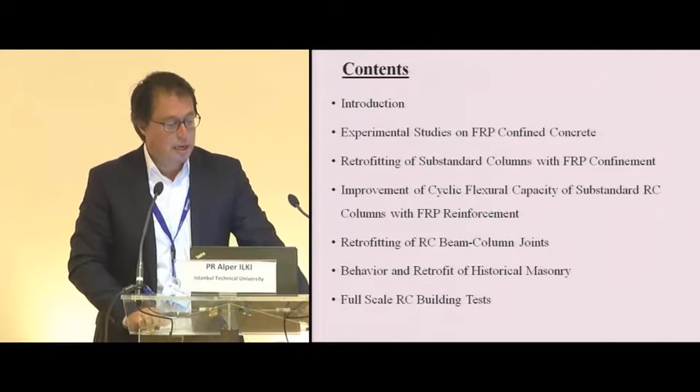In the content of my presentation, I will make a brief introduction, and then, similar to Maurizio and Thanasis, I will share some experiences we had on FRP confined concrete, and then retrofitting of substandard columns with FRP confinement.

That's very important for Turkey. The word substandard is very important for Turkey because we have a lot of existing structures in many big cities, and unfortunately a great majority of these structures are substandard in all aspects. Concrete quality is poor—meaning around 10 megapascal compressive strength on average, with some as low as 7 or 6 megapascals in many cities. Plain bars, poor detailing, and so on—you can find any kind of structural problem in existing structures.

The problem is that seismicity is much more severe than in France and the rest of Europe. So we expect severe earthquakes which could cause significant casualties and significant damage. That's very important for Turkey.

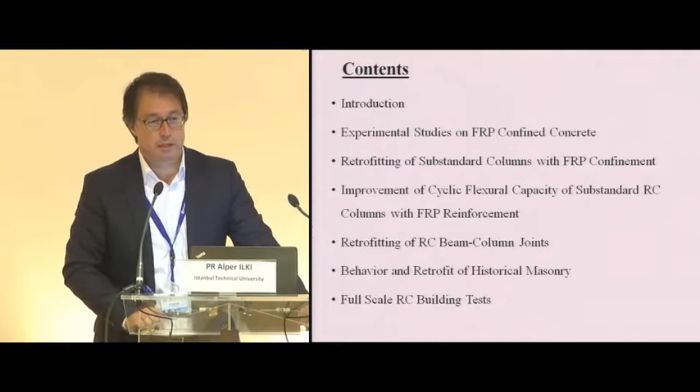In Turkey, there are seismic codes from very old times. Some recent codes were published in 1998, just one year before the great earthquakes we experienced in 1999. Then in 2007 we revised the code, and a new code will be published within about 3 months—roughly 500 pages on seismic design, including seismic safety assessment of existing buildings as well as seismic retrofitting. These two parts were added to the seismic code in 2007.

Constructions are much better now, but most structures were built in the 60s, 70s, and 80s. People are living in those buildings, so they need retrofitting. Unfortunately, the government doesn't look at the retrofitting issue very favorably—they prefer demolishing and reconstruction, which is not always possible. So there are still many structures that should be retrofitted. FRP is generally a good option, and owners of buildings are happier because of the relatively less disturbance to occupants.

Most of our studies have been focusing on substandard structures, which represent existing structures in Turkey and probably in many other places—perhaps some parts of Italy, maybe Greece, the Balkans. I believe there are similar structures there.

Then I'm going to talk about improvement of cyclic flexural capacity of substandard RC columns with FRP reinforcement. I was happy to see there are already works going on these issues in the private sector, by Freyssinet and other companies. Then I'll talk about retrofitting of reinforced concrete beam-column joints, and the behavior of retrofitted historical masonry structures, which we have a lot of in Turkey.

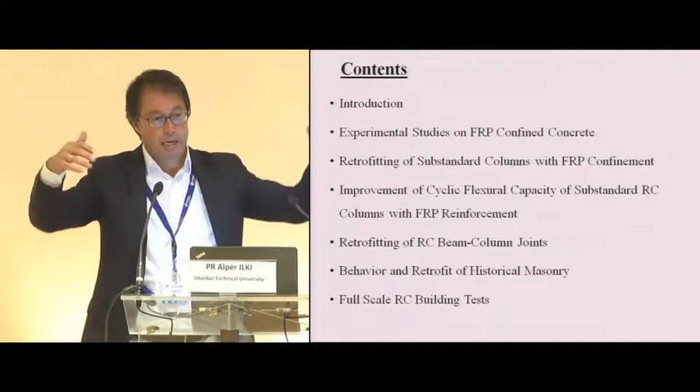I'm going to summarize some work we will carry out on full-scale real buildings of 3 stories within about 1 month. I was hoping to show you results of this test on two specially built 3-story structures on a field, which will be tested at the same time—one retrofitted with FRPs, the other not, but with all the same characteristics. Unfortunately, in Turkey we experienced very strange things, like a coup, last month, so we couldn't complete the test as planned. Therefore, I'm just going to show some preparations and theoretical aspects of this study.

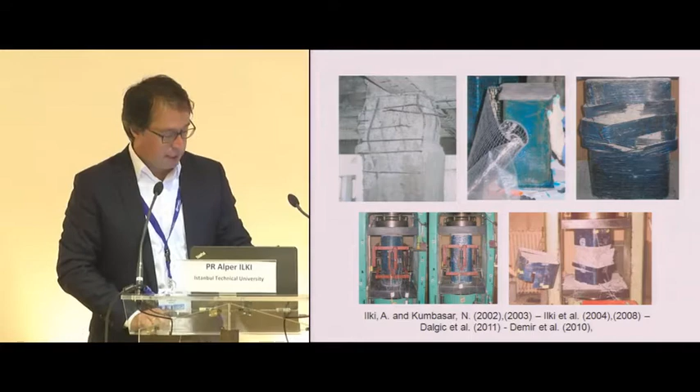So a little bit on confinement. As you can see, that's a great problem—even with good spacing, the hooks are poor. In many cases, spacing is much less or much higher than this in Turkey, like 20 to 25 centimeters.

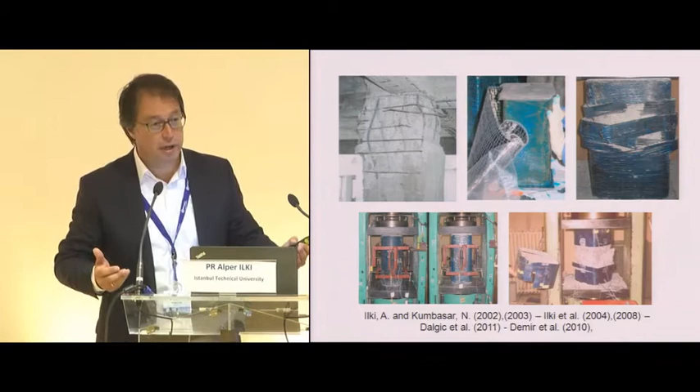Yesterday, Thanasis mentioned that if you have stirrups with 25 centimeter spacing, you shouldn't consider that as confinement. That's correct. In many cases, the details are also not good enough to consider them real confining reinforcement, because the angle is not 135 degrees but just 90 degrees, and the hooks are very small so you can never get proper anchorage. So almost they behave like unconfined concrete, meaning no ductility, which is vitally important during an earthquake.

Therefore, we began the work using confinement, but unlike the usual works carried out in literature, they were relatively larger scale specimens, and they generally included reinforcing bars inside to represent the actual situations in a more realistic manner. And we tested many different types of sections, many different types of concrete strength, many different types of fibers, hybrid fibers, pre-damaged cases, cyclic loading, etc.

Based on this work, but now we see that we can even apply these when the aspect ratio is like 3. Because even though it doesn't increase strength significantly, it has substantial enhancement in terms of ductility, which is much more important in case of seismic issues. That's the main issue in the earthquake. You need ductility, because particularly if you have a low quality structure, it is impossible to resist seismic forces with your strength, but what you can do is only to increase the ductility. So this was very good news.

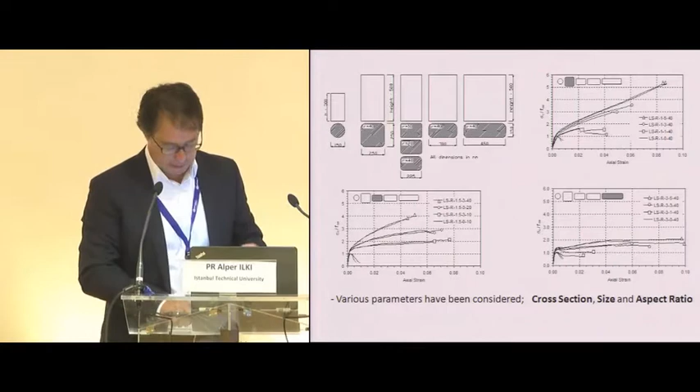And we examined different effects: loading rate, different types of concrete quality. Of course, there's good news about a bad situation. When you have low quality concrete, firstly, your concrete is more ductile. A 7 megapascal concrete is more ductile than a 30 megapascal concrete. And also, you can improve your behavior much more easily by using FRPs with respect to high quality concrete.

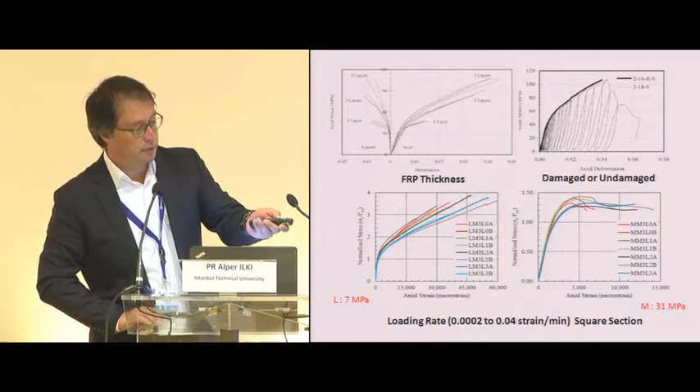So that's kind of an advantage. Here you see, for example, 7 megapascal concrete wrapped with FRPs, and here you see 30 megapascal concrete wrapped with FRPs. You see that improvements are significantly different. So it's always more difficult to enhance the behavior of a good quality concrete rather than a poor quality concrete.

In these graphs also, the loading rate was studied. And obviously, interestingly, when the loading rate is low, we had higher deformability, very probably because of the creep of the concrete during the loading. But again, this was different when the concrete quality is different. You cannot always say that loading rate is very effective on the behavior. It depends on the section shape, it depends on the concrete quality as well.

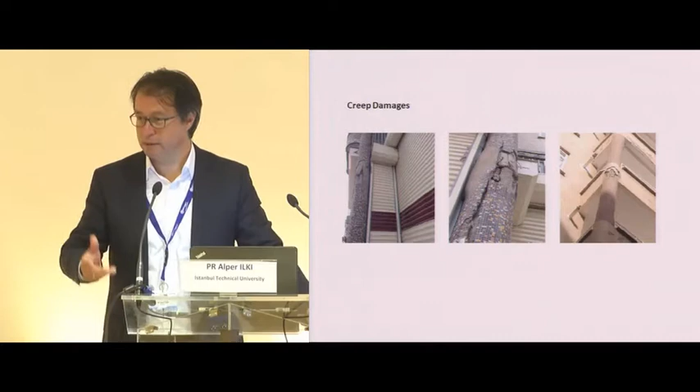About creep damages, this is a photograph from a kind of high-rise building, 12-story or something like that, in the east part of Turkey. These damages didn't occur during an earthquake. This occurred during vertical loads. Sometimes some structures collapse under vertical loads in Turkey, rarely, but it happens, without any extra load, without any ground movement or settlement, very probably because of creep effects.

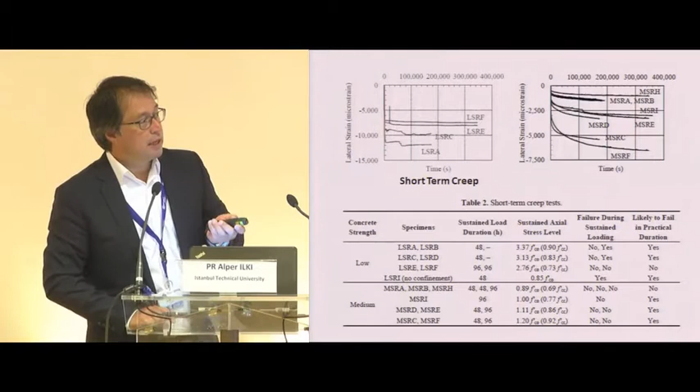Therefore, we carried out many works on long-term loading to see the creep effects and how we could improve the behavior under creep, under sustained loadings. I'm not going to go into details of these numbers, but basically I could say that you could significantly increase the creep performance, or enhance the performance under sustained loading significantly.

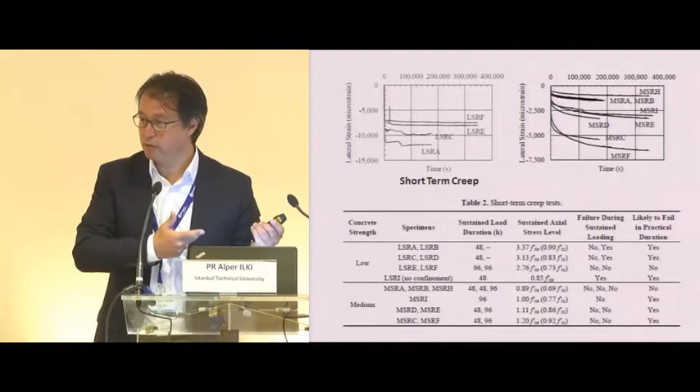Why is this important? Because, as I mentioned, in Turkey concrete quality is around 10 megapascal, whereas during design it was considered as, let's say, 20 megapascal. So normally in design, axial stress on the column is, say, 0.3 or 30% of the axial capacity. But in real life, it is 60% or 70% of the capacity, sometimes more. Therefore, creep is a significant, important, and common issue. So you have somehow to improve this situation, to avoid this kind of failure, even under vertical loads.

So this works as well in these cases too. I'm not going to enter into details, but I think you should have noticed yesterday that when you confine the section with FRPs, in case of rectangular sections, you have to round the corners to avoid stress concentration.

You see, obviously, the behavior is different. So there are a lot of models, as my colleagues mentioned yesterday. But if you don't consider, for example, this simple effect, you could end up with significantly different results. It's a small detail, but very effective on the behavior.

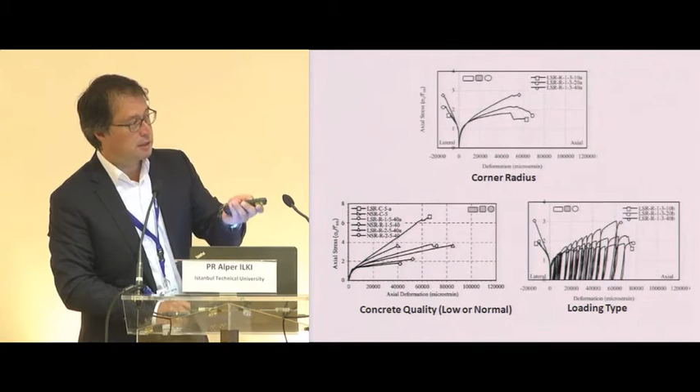I have mentioned that the concrete quality is important. When you have lower quality, the enhancement is much higher. And if you compare these two, cyclic loading and monotonic loading, they are identical specimens. The behavior is almost similar with some marginal differences, which is again good news for the type of earthquake loading.

And also we had many tests for determining the combined action of internal steel reinforcement and external FRP wrapping. It wasn't always like this type of scarce transverse reinforcement, but we had also frequent reinforcement situations as well. So I can, as a summary, say that you could think about the contributions of internal confinement and external confinement and sum them up, and you go to a reasonable situation.

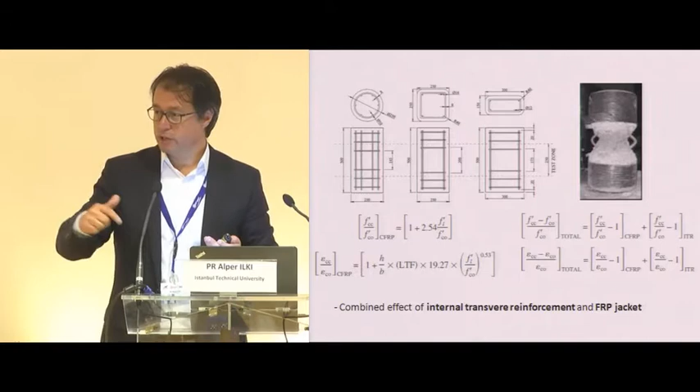So you can simply determine the confined concrete characteristics within the core using any model, say Mander model or any confined concrete model. And also you can consider the whole section using the external confinement, and you come up with a rational result for that.

And with that, I complete the concentric compression test, and I want to go ahead to retrofitting of substandard columns, of large-scale columns with FRP confinement.

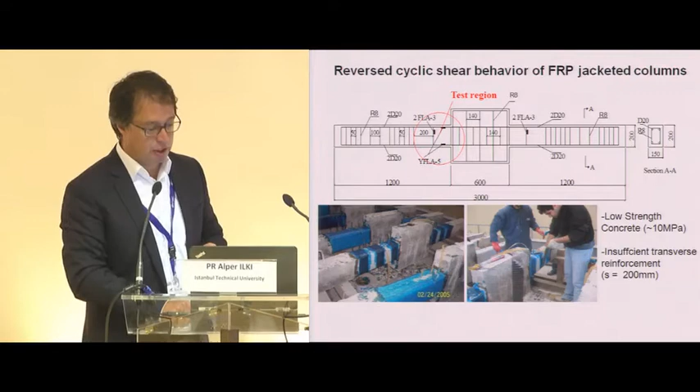There are some tests for shear. Yesterday, my colleagues mentioned that obviously we have a significant increase in shear. But what I have mentioned to my colleague from France was that, for example, these columns are retrofitted in shear using different FRPs.

So you should have a margin. I mean, if you have already used a lot of transverse reinforcement, it may be irrational to use some more FRPs because diagonal compression failure may be an issue.

Anyway, this depends on your situation. If you are lacking transverse reinforcement, yes, you can increase your shear capacity.

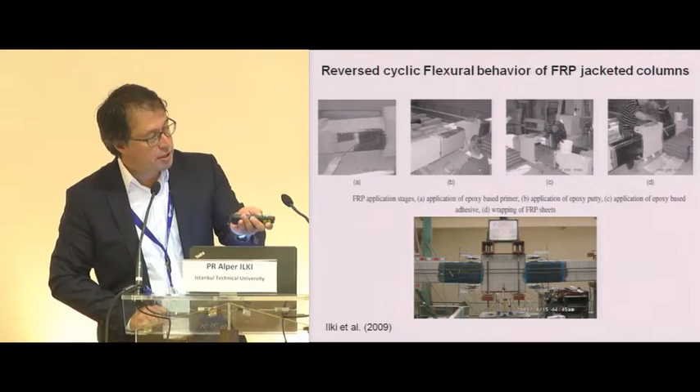These are another group of tests that we made retrofitting of potential plastic hinge regions of columns using FRPs and other different types of jackets. I'm just going to show you an FRP case. Again, my colleagues mentioned that you could improve the lap splices.

So these two groups represent two different types of specimens. In this group, there is no problem about lap splice, but the problem is about lack of sufficient transverse reinforcement. So the reference specimens behave in quite a brittle manner. The deformation capacity is very low.

And when you wrap them up with FRPs of different thicknesses or different application details, you can reach the theoretical flexural strength, so that's what we want.

But in case of deficient lap splices, in this case, where we used plain bars, the improvement is not as significant. I should say that in this case, when the plain bars are used, there is no hook at the end of the lap splices.

Of course, normally you should have this lap splice hook, but there are many cases where the hook is not applied at the lap splice. So if you think that the Eurocode equations may be valid also for plain bars, that's totally incorrect, because the external transverse deformation, which would lead to slip of plain bars, is much less with respect to deformed bars.

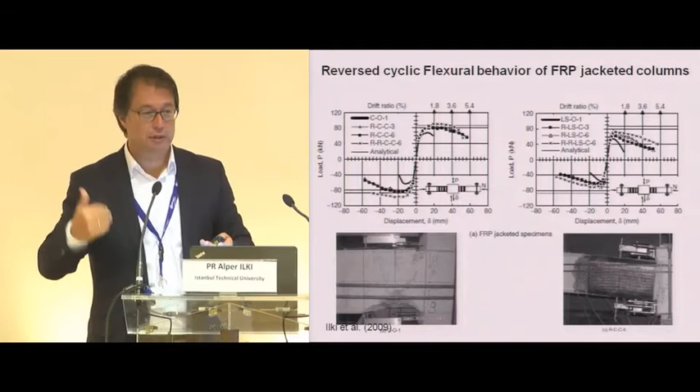So this kind of lap splice deficiency in case of plain bars without hooks would not work well. Only small enhancement in the behavior could be obtained.

This is another group of specimens, quite large scale. The section is 30 centimeters by 60 centimeters. The PhD work is ongoing. There are different sections with cross-section aspect ratios of 1, 2, 3, and 4.

So we are testing rather full-scale specimens like that to see whether we can extend the existing equations, existing approaches, for larger scale specimens as well as larger aspect ratios.

The tests were carried out in two directions: on the strong axis of the column, so the lateral load is in the direction of 60 centimeter depth, and also in the weak direction of the column, which is more critical because we don't have the cross ties.

When you have the FRP, it's good in the strong direction because the compression part is quite close to corners where you have good confinement. But during loading in the weak direction, you may need cross ties.

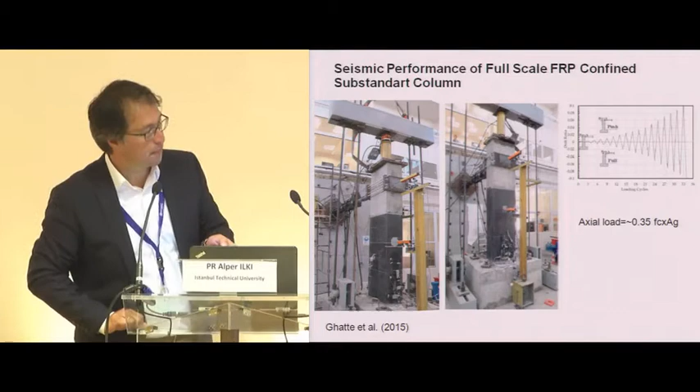If you look at the failure of this specimen, which is 30 centimeter by 60 centimeter and loaded in the strong direction, the axial load is quite high. There were different levels of axial load, but this test was under 35% of the capacity of the column. So keeping that load, we applied reverse cyclic loads.

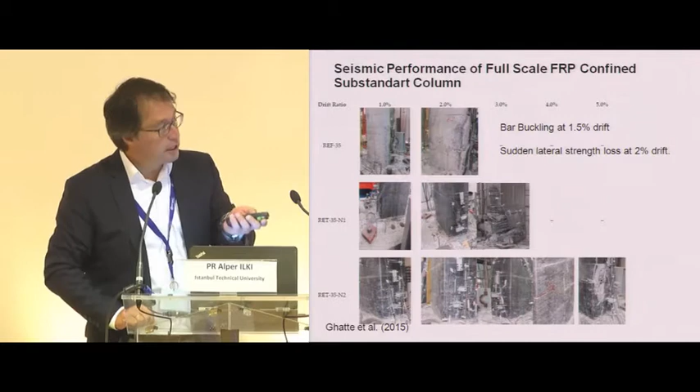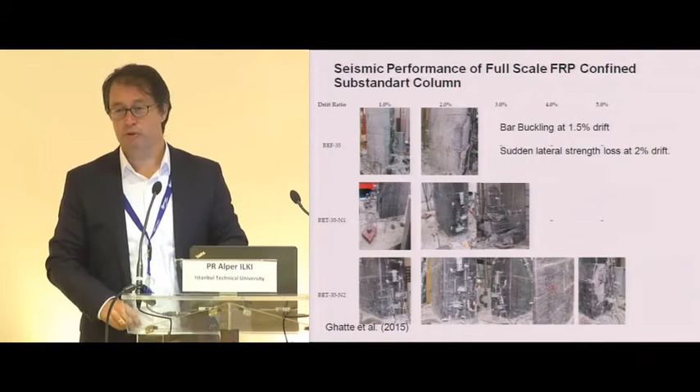The reference specimens without retrofit were damaged significantly at 1.5%, and suddenly lost lateral strength at 2%. When we retrofit the column with 1 layer and 2 layers of FRP, the specimens could sustain the lateral load up to 5% drift, which is quite good enough for even high seismic zones. So significant improvement was obtained.

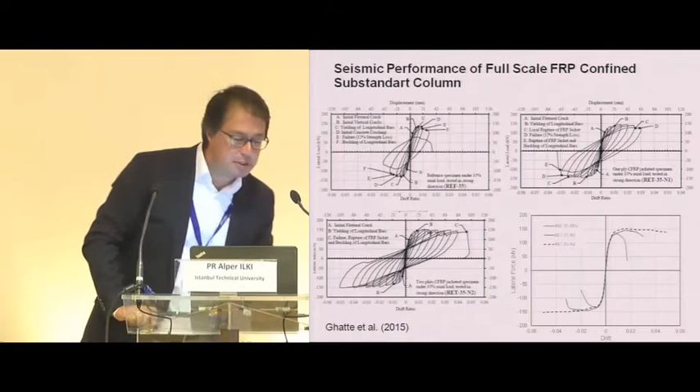This shows the load displacement graphs. You can see both the drift ratios and displacement values here, and load values here. So that's the reference specimen - a behavior that you wouldn't like to have. After retrofitting, you have this type of behavior, and this shows the comparison of the envelope curves of these load displacement diagrams. So absolutely we could go where we wanted to go.

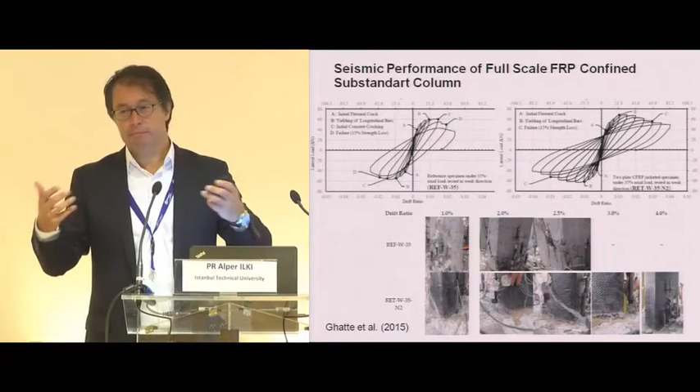This shows two specimens tested in the weak direction, where FRP might not be equally effective because you don't have the cross ties. But still, as you notice here, the ductility is improved with respect to the reference specimen - not much, but again better than the reference specimen.

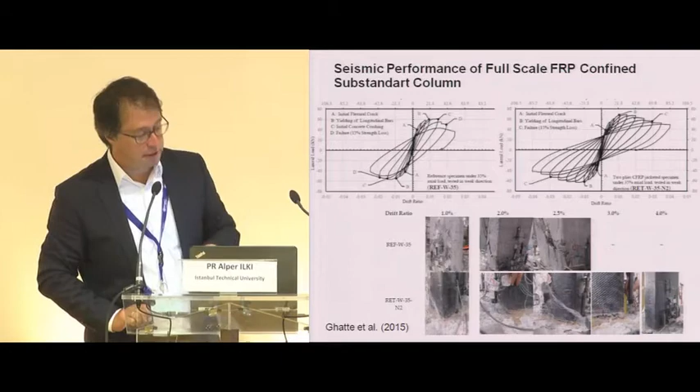So another issue which is relatively new: improvement of cyclic flexural capacity of substandard RC columns with longitudinal FRP reinforcement. Flexural retrofit has been done for beams, span sections of the beams, for a long time, but not for columns where we have moment reversals, and also the anchorage is an important issue to the foundation.

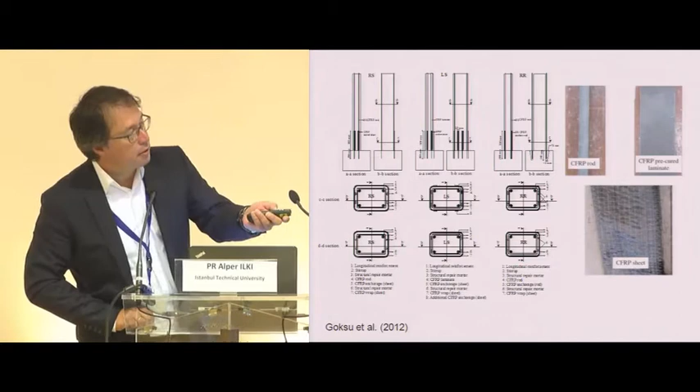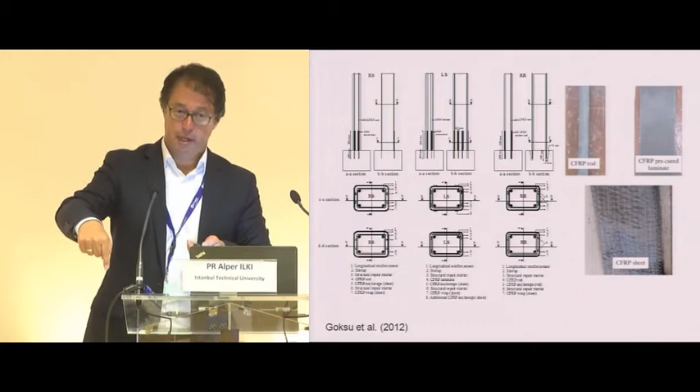At the end, we determined that when we have to open a large hole - not like a driller, but a large hole - by breaking the bottom part of the column, and using a good grout and putting the rod inside, this works. Otherwise we always had difficulty because it's very difficult to do this properly using normal workmanship on site. If you try to put epoxy inside a drilled hole, at least we couldn't manage this, although we paid a lot of attention. So practically I think it's not possible to have a good result by drilling a hole and trying to anchor it inside.

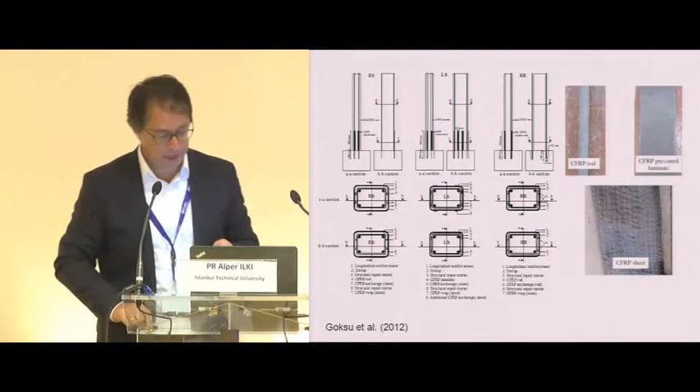So with that, there are some applications here. This was an interesting application actually, because that's not like external bonding, and also not like near surface mounting. In Turkey, generally for these old types of structures, we also have corrosion problems, and since concrete quality is poor, what we have to do is generally take out the concrete cover to clean the rust. You have to do this also because there are a lot of cracks already on the column. When you remove this, it's also good because you can have a better cover concrete with a better repair mortar.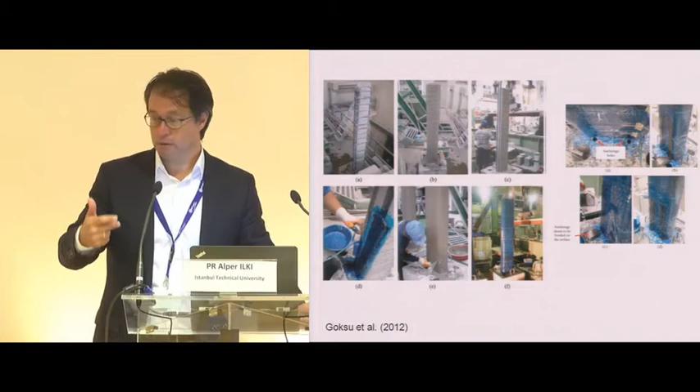Then put the reinforcement, FRP reinforcement, and make the cover again using a good, better quality repair mortar, and then wrap it in the transverse direction to avoid shear failure, because when you increase your flexural strength, you may be in trouble in terms of shear due to capacity design. So you also have to use transverse reinforcement using FRP sheets.

But when you properly anchor the rod to the hole that you opened in the foundation, you could achieve both very high strength, which is maybe too high in this case, but more importantly, the drift capacity to sustain this load is more important. So you have a much more proper behavior.

If you look at the joints, which are often problems in the corner members, I think yesterday one of my colleagues mentioned that if you have good columns, the joint may not be that important because you have the slab and transverse beams framing into these joints. But in the corner joints, the situation might be a little different and might cause significant problems, as you see here. So we tested large-scale, full-scale columns or sub-assemblages, and you will see three-dimensional frames to examine this behavior.

I want to remind you of three types of failures I'm going to talk about: J-type failure, which is the shear failure of the joint; SJ-type failure, which is a slip of longitudinal bars of the beam within the joint, followed by failure of the joint; and B-type failure, which is what we want, where the joint doesn't get any damage but the beam fails due to flexural mechanisms.

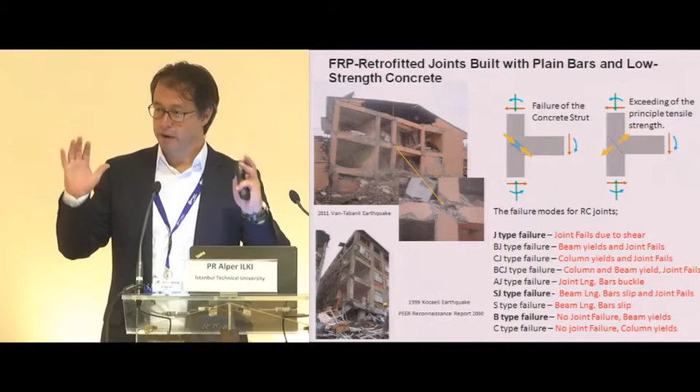So I will show you three specimens of different arrangements showing how we obtain these three kinds of failures. These are the joint specimens tested, about 20 specimens were tested like that. They are full scale. The columns are 25 by 50, and the beam is 25 by 50, and also we have a same dimension transverse beam and a slab of 8 centimeters.

Often joint tests are carried out without this transverse beam and the slab. I think there are two problems with this type of test. One is you underestimate the performance of the existing joint, because you omit the transverse beam and the slab, which have some effect on the shear performance of the joint. Secondly, you overestimate the effect of retrofit, because you can easily wrap that kind of joint, whereas you will not be able to do that in practice because of the presence of the slab and transverse beam.

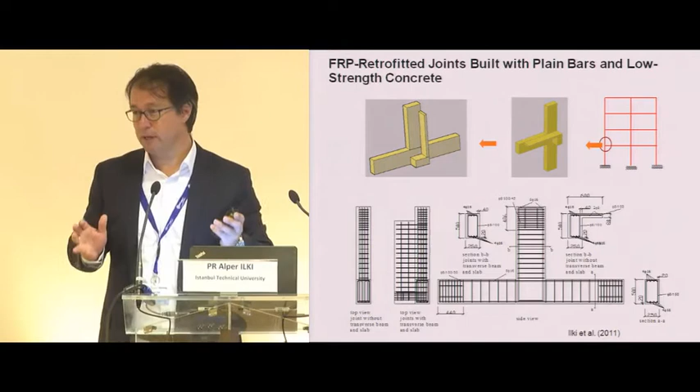You see this specimen, as you clearly understood, this is the column, horizontal, this is the beam. And as you see, there is no reinforcement within the joint core. This was the actual practice in Turkey until the 1999 earthquakes—no joint reinforcement, you cannot find any.

So this is the testing setup. We had axial load of different levels, from 10% to 50%, even more than 50%. These are some measurement details, and this is the loading pattern, displacement controlled.

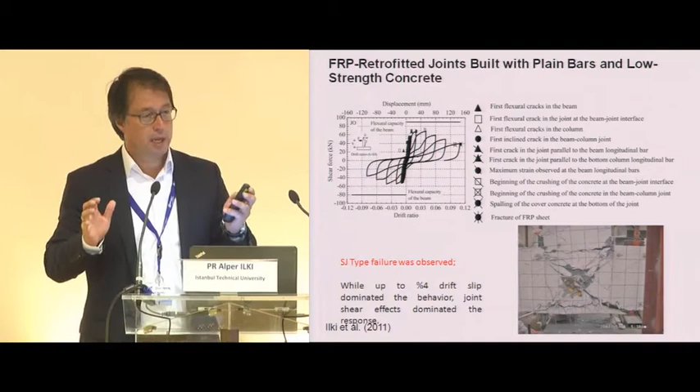And this is the behavior of the reference specimen. Hard to decide if it's good or bad. This is the theoretical flexural capacity. In this specimen, beams are weaker than columns, but joints are weaker than the beams, so the critical part is the joint.

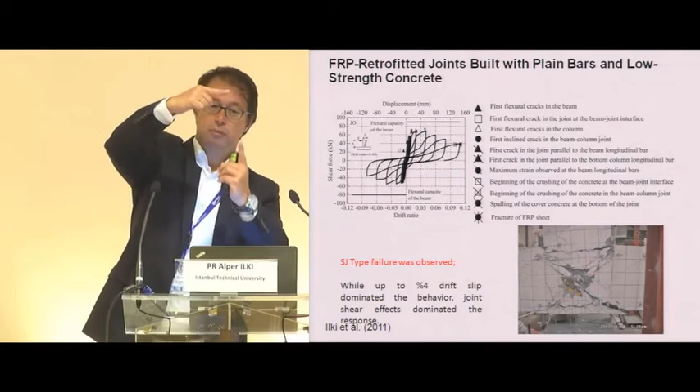I don't know, how do you evaluate this one? This is not too bad, I guess, because even though the capacity is less than anticipated during design, the joint can sustain its capacity until 4% drift, through a mechanism we never considered during design. What happens is that under reverse cycle loading, the beam longitudinal bars hooked into the joint cause crushing of concrete in front of the hook. Therefore, the bars slip out before reaching their yielding stress, so the capacity is less.

However, due to this unforeseen slip type of behavior, we have a kind of pseudo-ductile behavior, so you don't lose the strength, unlike shear failure. Interestingly, if everything was as we wanted, so there was no slip, there would be shear failure, which is much more brittle than this. So anyway, this is still not the thing we want.

But you should consider this during actual life, when you make a design decision like, okay, I'm going to wrap it. No, it will not work, because there will be shear failure, and your FRPs probably will not work in such a case, for example.

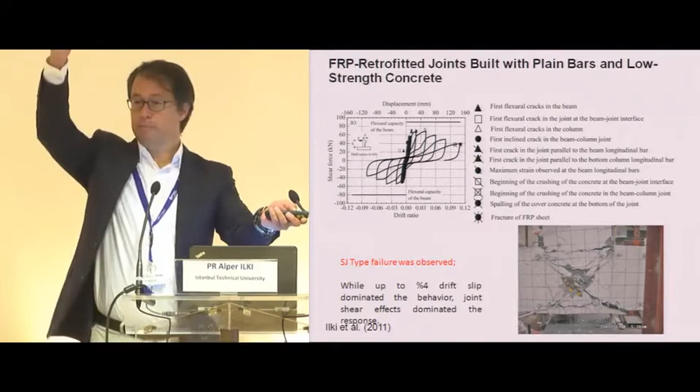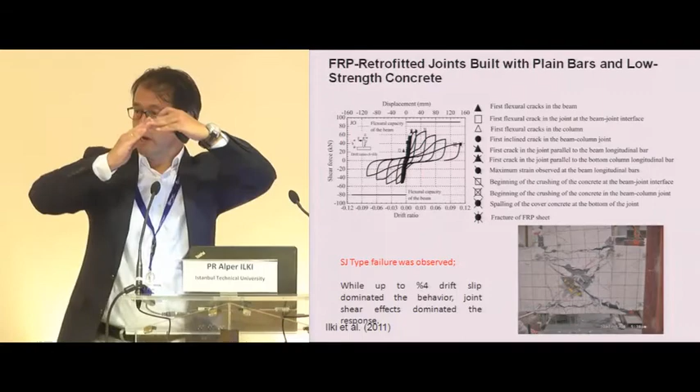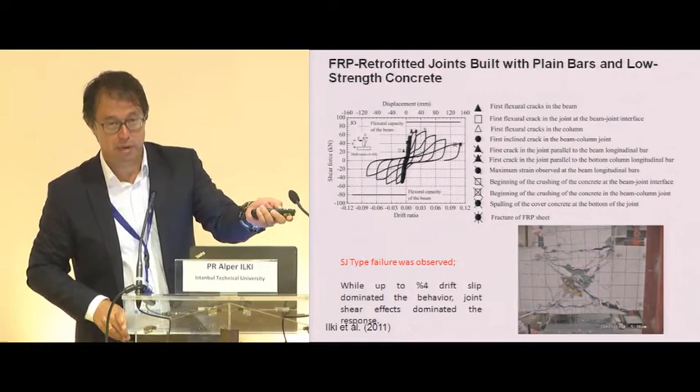So firstly, this problem should be solved. By the way, I should highlight this point: the main crack is here on the beam, just at the interface of the beam and the joint. There were some shear cracks because the hooks of the longitudinal bars were going out, crushing the back part of the joint. But the main damage was the crack at the interface, basically due to slip of longitudinal bars. This explains the mechanism. This is the damage, and this is what happens to the longitudinal bars. So main crack here, and also some damage because of hook deformation, and some shear deformations and damages.

So if you directly apply FRP, you don't get any change. I'm not going to show the result here, but we tested it as well. This specimen, you wrap it up with FRPs, nothing changes because slip occurs again. So you gain nothing. You do a lot of things, gain nothing. So first, you should somehow avoid this kind of slip of longitudinal bars, which is not easy.

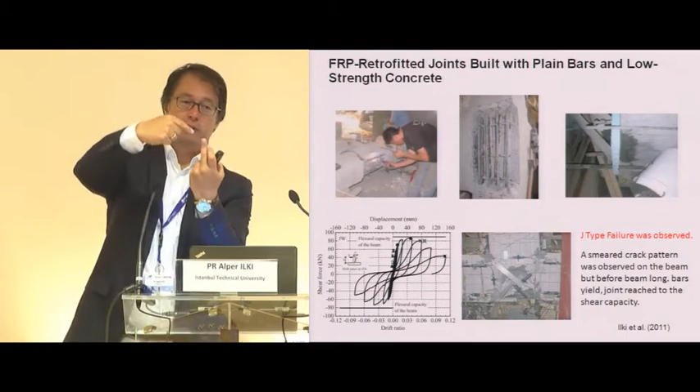What we did was, we removed the back part of the joint. You can do that because there's a corner joint, as I mentioned, so you can go up there and clean the cover concrete. On top of that, just in front of the hooks, behind the hooks, we changed the concrete with a better quality concrete, kind of repair mortar. So now, in front of the hooks, you have a better concrete which could resist compression stresses. And also, we just welded the hook of the top bar to the hook of the bottom bar. So we hoped that we avoided the slip, and we really did.

As you see, we could reach much higher strength, but then shear failure occurred at this strength level, so we had a brittle failure.

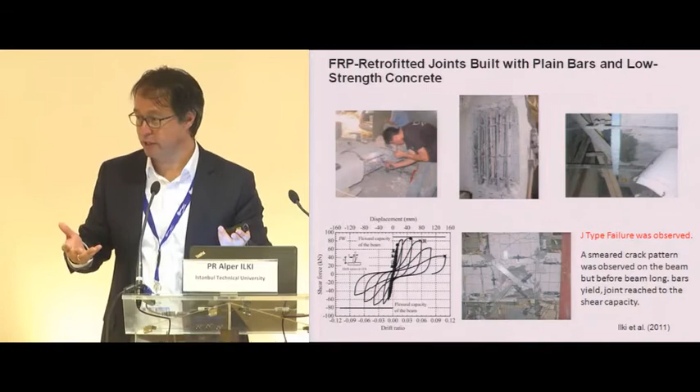Now this is a better specimen to see the contribution of FRPs, because we want to avoid shear failure. We retrofitted such joints, which fail with shear failure, using different configurations of FRPs. Note that these are totally applicable details because they represent the real assemblage totally. All you have to do is remove some part of the wall here and here. There's no anchor, there's nothing, just you wrap the joint and the column, that's it. No drilling and no bonding into the drill holes.

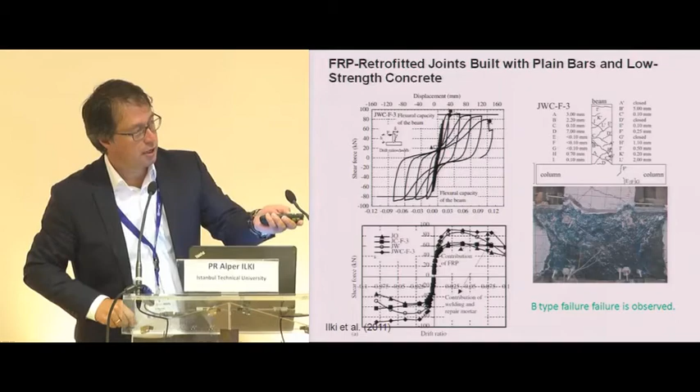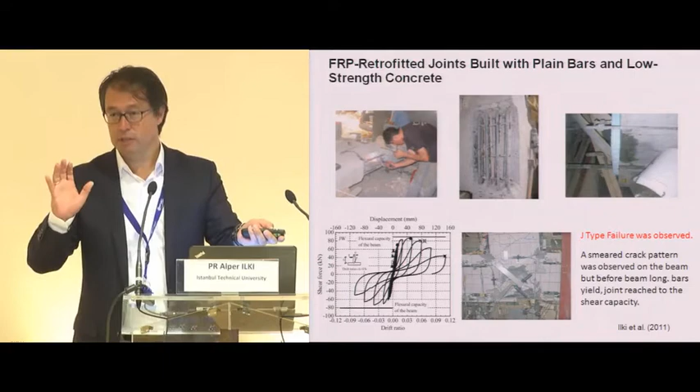And what we came up with is such a behavior, which is B-type failure. So we didn't have any damage on the joint, just small cracks. The main failure was due to the bending of the beam at its yield capacity, so we reached the target. Here you can see the damage of the beam flexural failure. If I go one back here, you can see the total shear damage here. In this case, we didn't have any slip cracks, but we just had the joint shear crack.

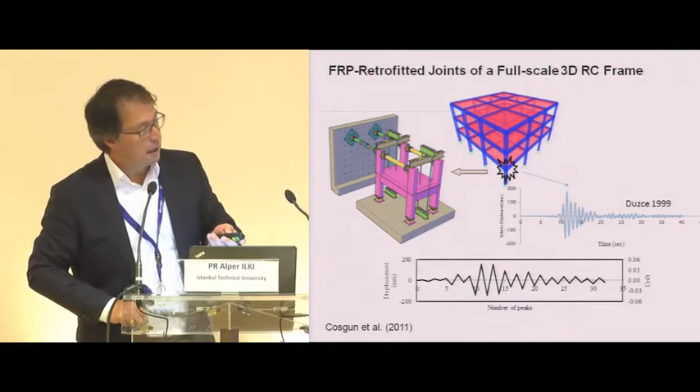So we wanted to verify this in larger scale specimens. As you see here, these are full scale specimens, representing the half height of the top story and half height of the bottom story, but all the sections and dimensions are full scale. Again, we had different levels of axial load. I'm going to just show some tests because they were all almost similar; the loading was a little bit different. We applied the Düzce earthquake record, analytically calculated it, and then applied it in a quasi-static manner to the specimens.

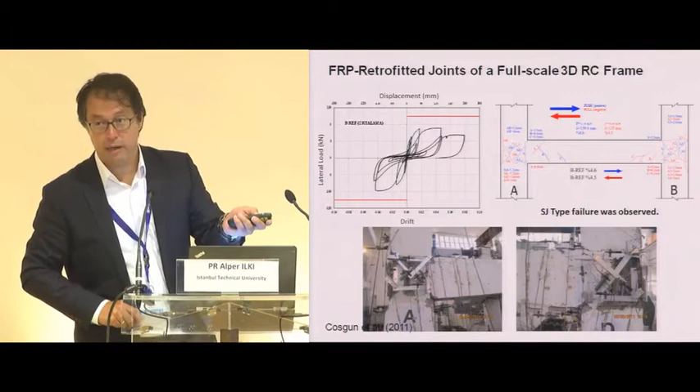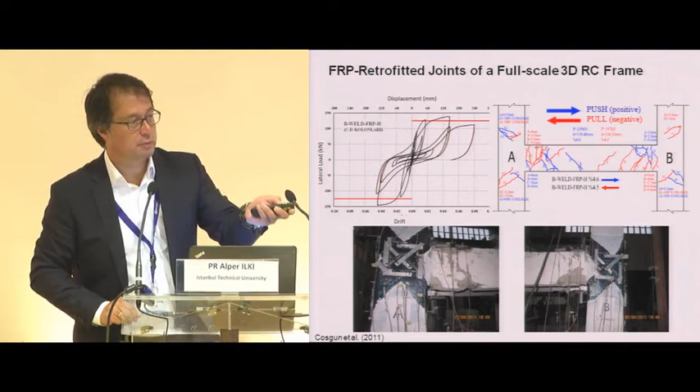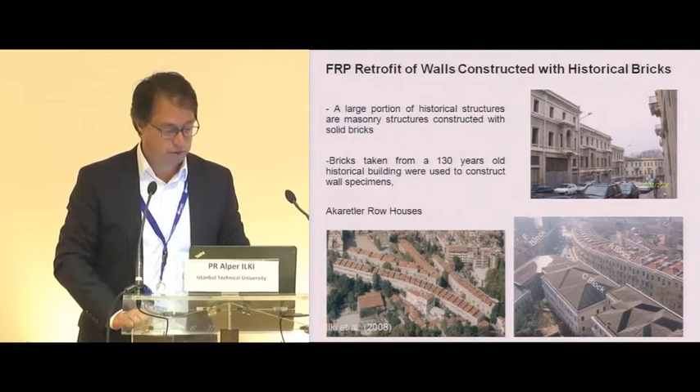If you look at historical masonry quickly, we have a lot of these types of buildings, 200 years old, 300 years old, 100 years old. Towards that, we made many tests, like this kind of diagonal tension test. Generally, we use real bricks taken from the original structures, which are demolished somehow, and also we use mortars which replicate the historical mortars.

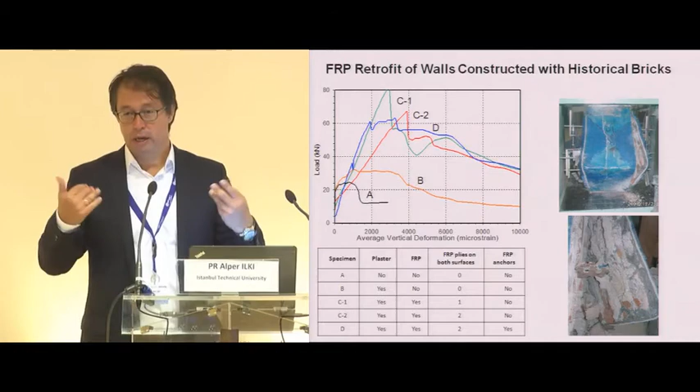We use different types of FRP, different types of configurations, different types of anchorages. And at the end, we always see the significant contribution of the FRP retrofit, particularly if you are successful to avoid premature debonding of the retrofit system over the surface.

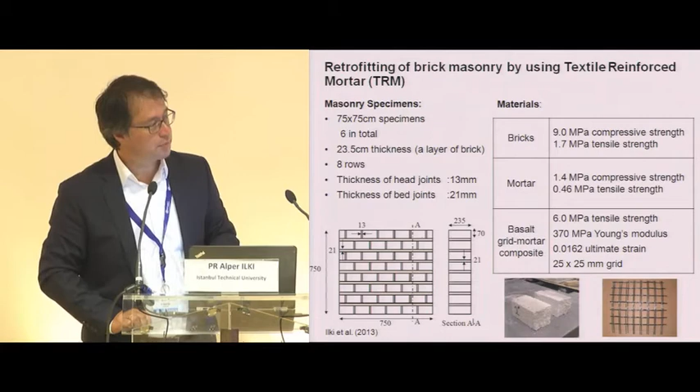And also we tested specimens using textile reinforced mortars, using open grid basalt mortar composites. We made diagonal tension tests, as well as axial compression tests on different aspect ratios of the sections, and again we obtained quite good results in an expected manner.

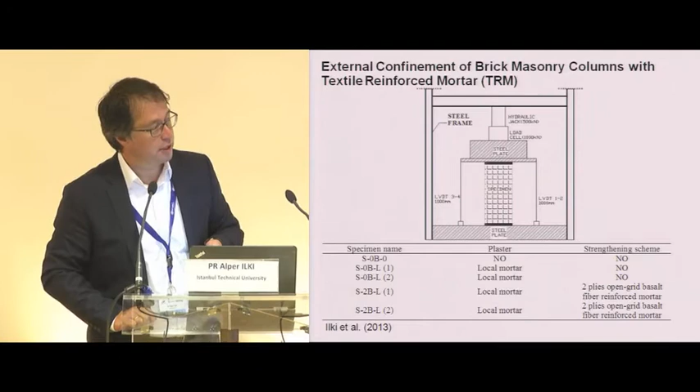So I'm going to pass those quickly. If you have questions, I will try to answer at the end. This shows the axial loading test results.

So now I'm going to show you a full-scale test we carried out on site. We finished this several years ago, and you can see many details on this web page. Also on YouTube, you can see a video, a kind of documentary of this study within 14-15 minutes.

We tested a real building, a part of a real building on site, three stories. Since this building was quite good compared to many examples we see in practice, the concrete quality was a little good, and it had a strong column, weak beam configuration, which is rare. So we built another structure here, replicating the characteristics of existing structures in a more realistic manner: lower quality concrete, strong beams, weak columns, and we tested both of these structures.

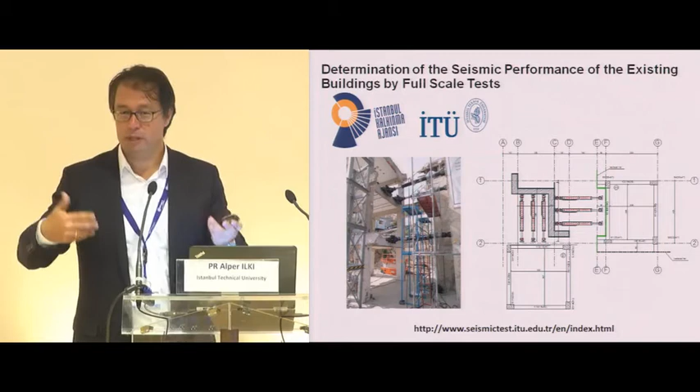This has nothing to do basically with FRPs, but it's an interesting example that I want to share with you, and maybe some videos may work, I don't know.

What I could say is we had totally different failure mechanisms than anticipated. You can make detailed theoretical analysis, but in all cases we had significantly different behaviors. For example, in this building we had buckling of beam bars, buckling of column bars. Normally when you make an assessment you don't take into account the buckling of bars, so you get a totally different result.

We are talking about chord rotation limits, but everything is going on a different way when you are talking about a substandard structure.

This was very surprising for us to see, even though we had experienced that on individual columns. To see it at a structural scale is quite different.

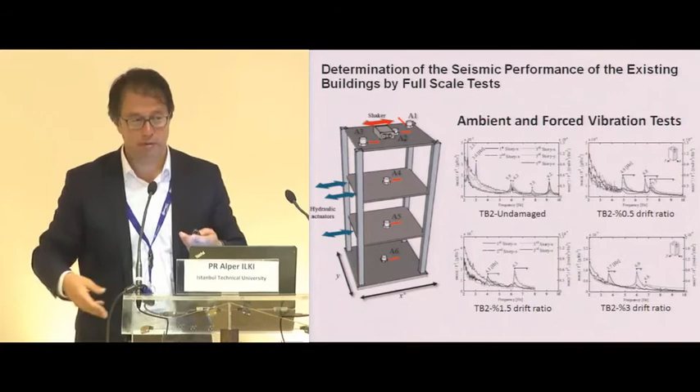At the same study, we also carried out some dynamic shaking tests using shakers and accelerometers at different damage states. So we pushed and pulled the structure to 1% drift, removed the actuators, and did shaking to measure dynamic characteristics at different levels, to get a relationship between dynamic characteristics and damage level.

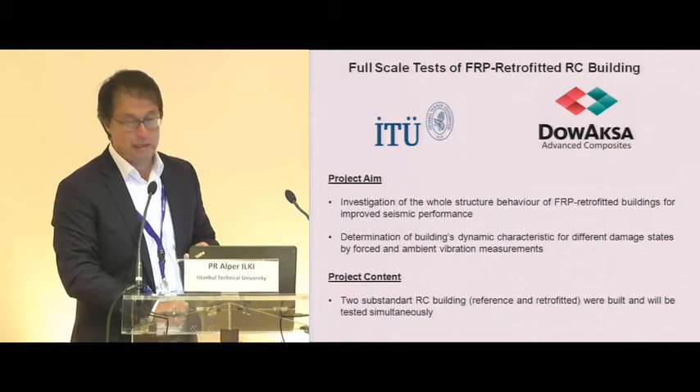Anyway, the final issue I'm going to talk about is the large-scale test we plan to do in the near future, probably next month, in a city close to Istanbul.

And they will be tested at the same time, which is quite a difficult work. This one is expected to collapse, and they want us to collapse the building.

I'm going to show you that we expect collapse at like 1% drift for this structure. But since this other structure is wrapped with FRPs, probably it will go to 4% drift. I don't know, we are going to see that. Theoretically, it will go.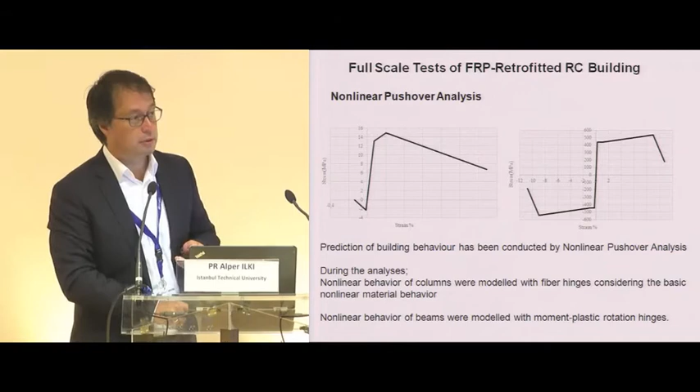Beam details, foundation and construction stages, the walls, and some theoretical analysis to see what kind of behavior we are going to obtain for the reference specimen and the retrofitted specimen.

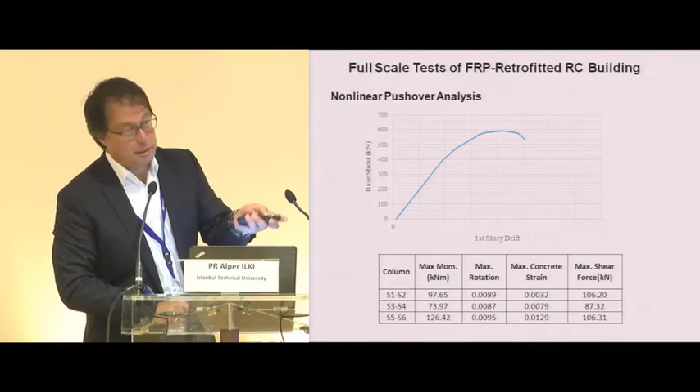That's the pushover curve or capacity curve of the reference specimen, where the drift is about 1%. That's prepared in MAC, so there's some incompatibility, so you don't see the drift ratios here. But I could say that we expect failure at about 1% drift, which is not good enough for good seismic behavior.

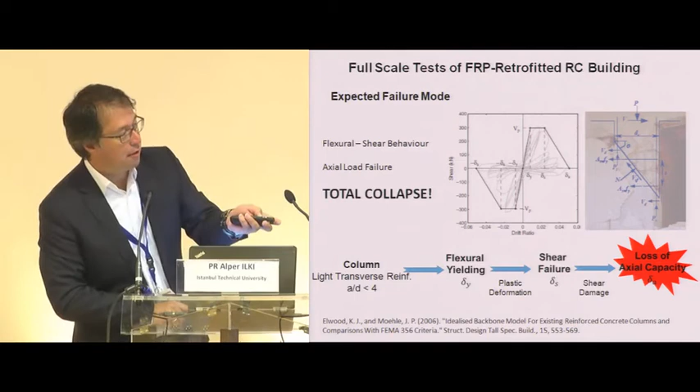What we expect is first we will have flexural yielding, and then with increase of deformations, we also expect some serious shear problems in the column, and then we will have axial load collapse of the columns. Quite sophisticated analyses were carried out, but I'm not going into the details. What should be emphasized is there will be problems about flexure, problems about shear in the reference specimen, and also axial collapse is expected to occur.

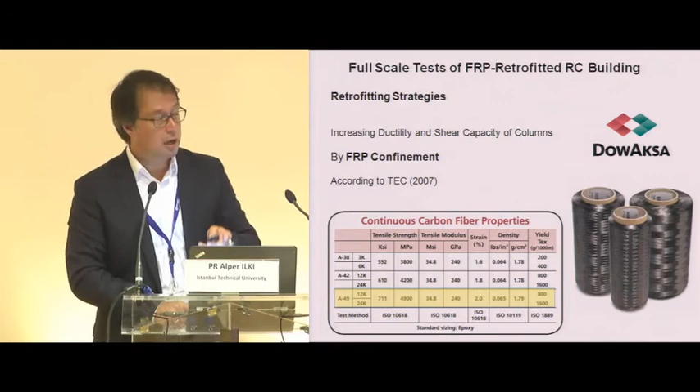For the retrofitting, we wanted to increase the ductility, therefore we increased the ultimate compression strain of concrete to 1.8%, at least theoretically. The theoretical target was that. With that, we come up with 5 plies of carbon FRP wrapping of the columns. We could reduce that, and it would still be good, but since this is a kind of demonstration test, we didn't want to have any problem.

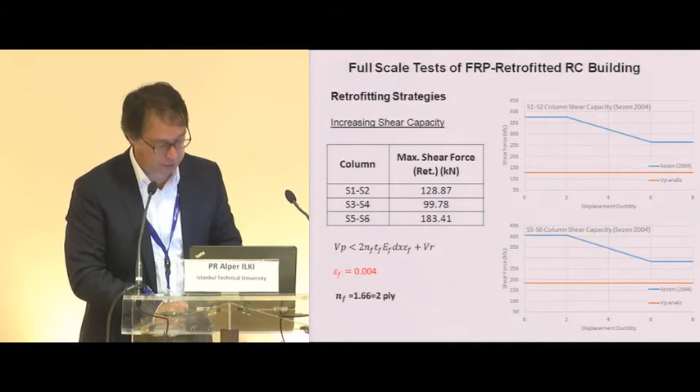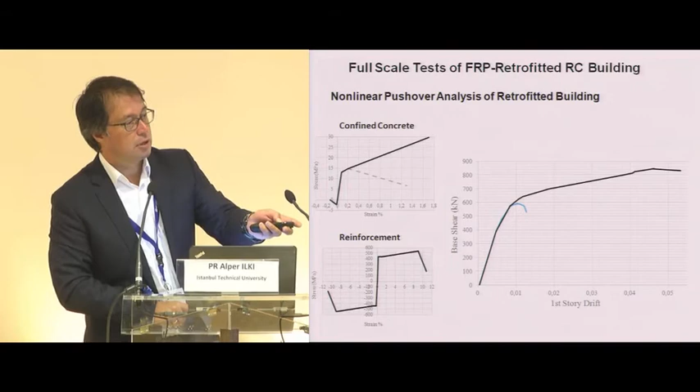So then we totally avoided the shear failure. Also, we retarded the flexural failure significantly because of the increased ultimate capacity of concrete in compression. Here is the unconfined concrete behavior versus FRP confined concrete. And these are the lateral load drift ratios for the reference specimen and the retrofitted specimen. Of course, these are theoretical, and we are going to see what is going to happen in the field.

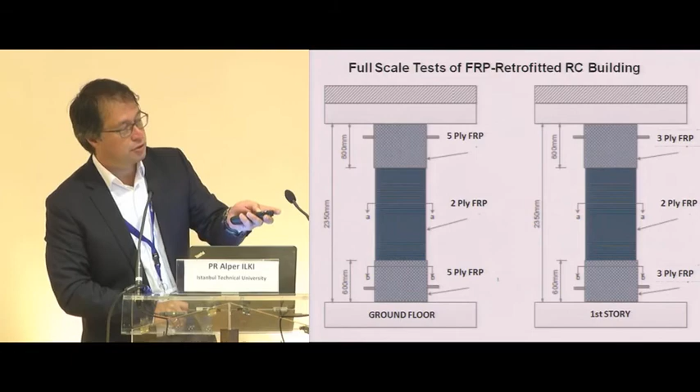So the retrofit scheme is like that. For shear, for the ground floor, that's the first story, or this first and second story, we have 2 plies of FRPs for shear throughout the column height, and for getting improved ductility at the maximum moment zone, plastic hinge zones at the top and bottom parts of the columns. 5 plies at the ground story, and 3 plies total, 2 plus 1, and here 2 plus 3, 5, to avoid brittle failure of the plastic hinge zone.

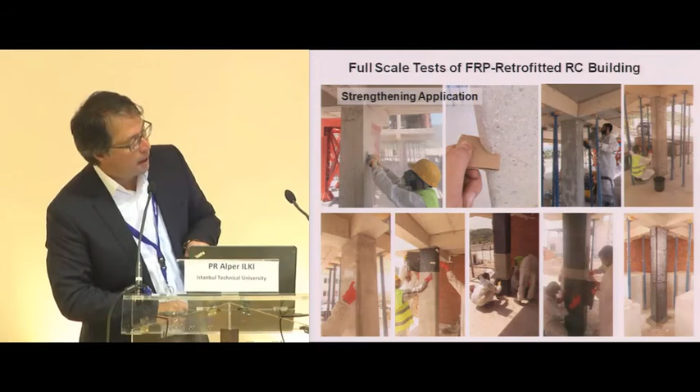And this shows just the detail of how we wrap it, and some photographs from application of the strengthening works. Test setup, I'm not going to enter into details.

Measurement system, this is already on. We would do the test, just this coup happened before this coup event had happened. So we hope to execute the testing hopefully at the beginning of October. I'm very excited to see what kind of behavior we are going to obtain.

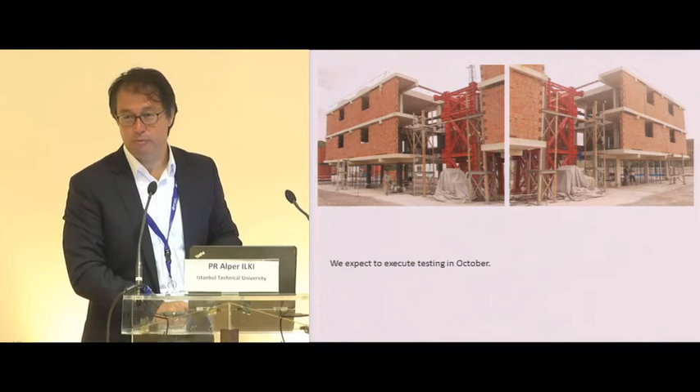Just one last example, which might be interesting if the videos work. We also made some tests on impact for improving impact resistance, because what we saw is that these are good quality concrete members, concrete columns with axial load on them, all complying with the codes.

When you load it statically, like a car hitting the column, one of my colleagues has shown, you have a flexural type of behavior. But if you apply an impact load to the same point, the behavior changes from a ductile flexural mechanism to a brittle shear mechanism. So if you make a static analysis, everything is okay.

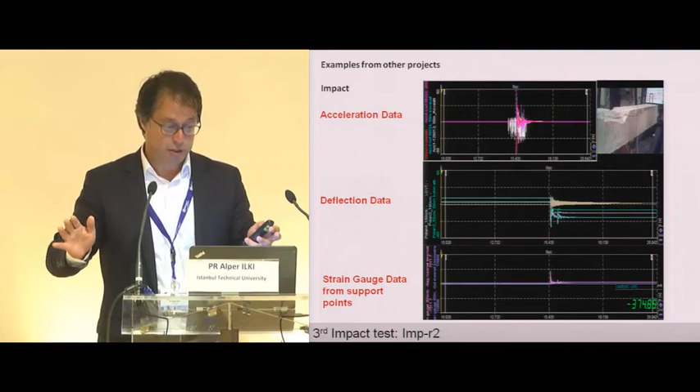You have a very nice ductile behavior in the test too. But if you apply impact, everything changes. If this works, we will be able to see that.

This shows the acceleration, displacement, and strains on the reinforcing bars. I think it's not visible nicely, but there was a very, very severe shear crack. I mean, it's not a crack, it's a kind of very, very bad failure.

So when we retrofitted with FRPs, probably this will not work as well. Let's see. No, it's not working.

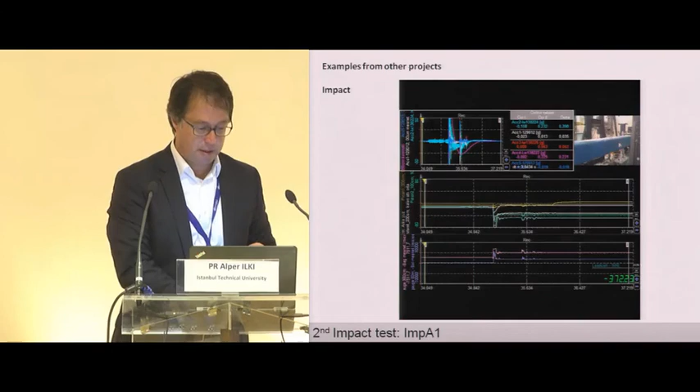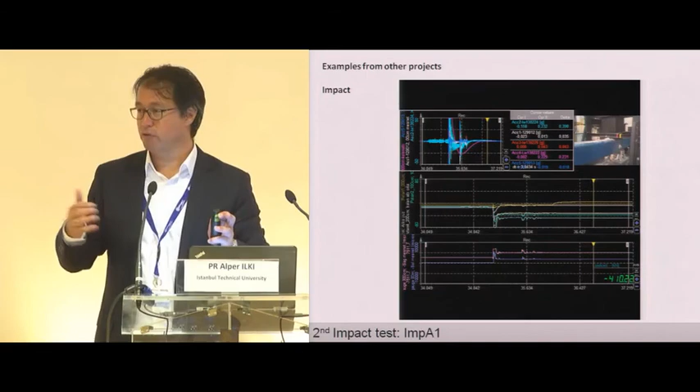Anyway, the shear failure was totally avoided, and we just got a much, much improved behavior in terms of flexural types of behavior. So for impact type of loading, again, this time we use aramid fibers for retrofit of these columns, but we got a significant improvement in the behavior.

I'm sorry that I couldn't show you the videos here.